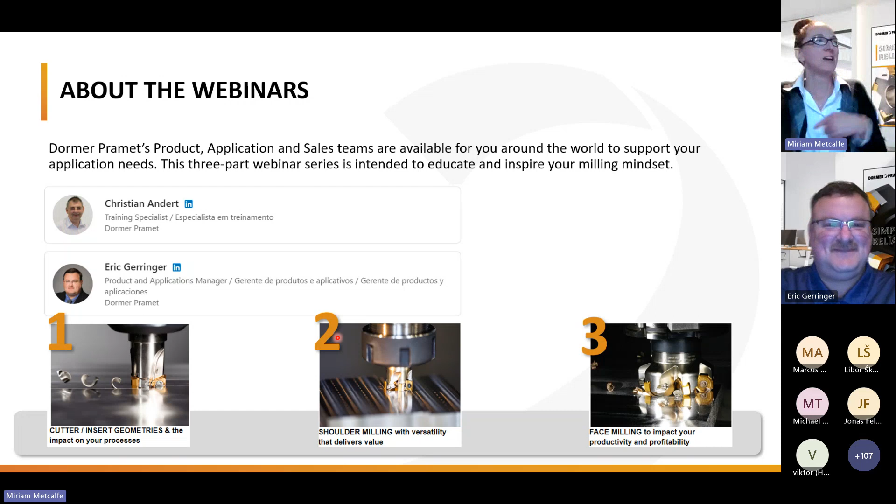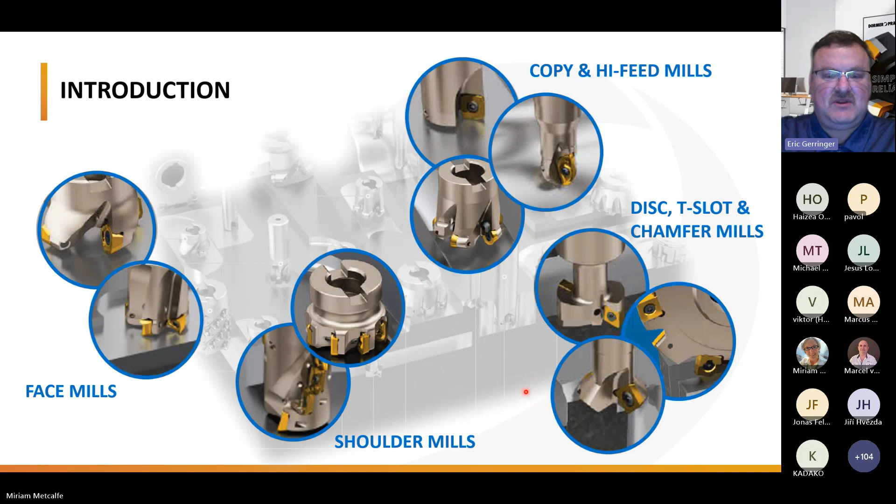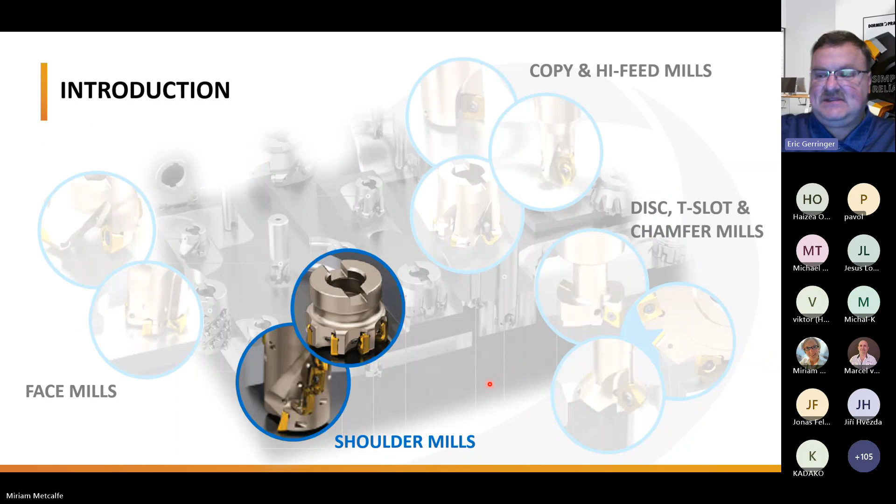So we'll touch briefly. Hopefully everybody was able to join us last week and remembers the 4 areas of milling we discussed. But today we're going to focus on shoulder milling and the versatility of shoulder milling. We'll touch on some areas such as milling methods and the versatility in shoulder milling. From the indexable shoulder milling applications, you start out, and you can also, from the perspective of general shoulder milling, think about solid carbide or even HSS or cobalt in some instances where you need that long AP, or that long length of cut. We'll touch a little bit on some repeated shoulder milling using end mills and face mills. We'll talk about some deep shoulder milling as well, using the helical style cutter, the long edge cutters with the inserts up the side. And we'll also touch briefly on some peripheral milling as well.

So, let's talk about the indexable shoulder mill applications.

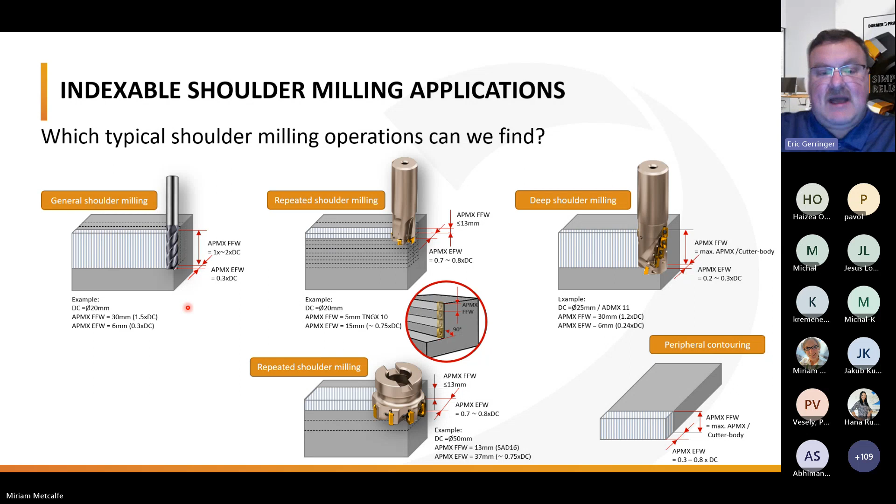So here you'll see, we just spoke about peripheral milling, a very common application. When you think about that, typically you're using end mills, usually smaller diameter cutters when you're doing peripheral milling. Of course, it depends on your workpiece.

You could be using large diameter cutters, but typically it's an end mill application. Some customers will even use solid carbide, HSS, or cobalt end mills when they're looking for that fine finish with no step overs from stepping down. But when you think about indexable tools, the versatility you get versus a solid tool lets you do many more things, and from a cost efficiency perspective, you're in better shape.

And then over in the middle area, we look at more of what I'd consider the standard types of shoulder milling applications. When you're talking about shoulder milling, you're typically milling a face and milling a shoulder, looking for that surface, and a lot of times you have a radius callout as well.

So this concept offers those extra geometries and radii to suit your needs. And one thing you'll see, not as common but still used in face milling, is disc milling cutters. I like to bring that up because it's one of those things to keep in your back pocket, don't forget about it.

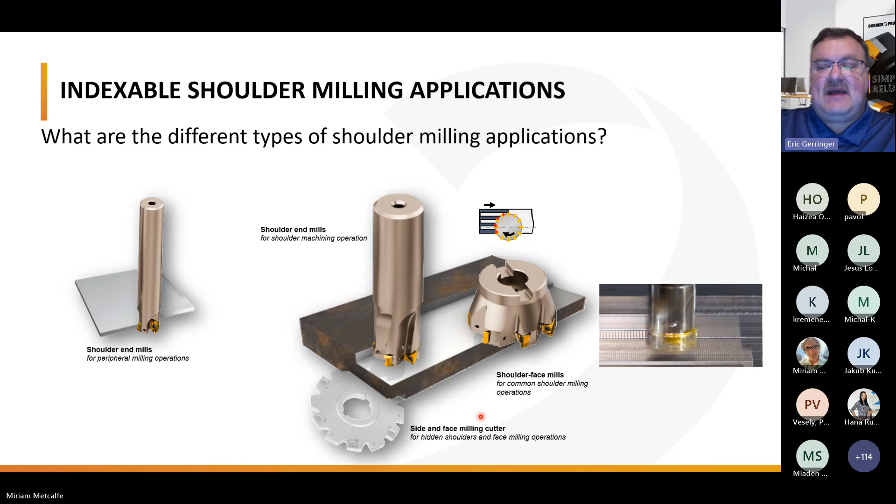With indexable shoulder milling, you can never forget about deep shoulder milling. There's a lot of terminology used in the industry - you think about helical mills, that's a pretty common term, and you'll also see the term long edge milling cutters. These cutters typically have multiple inserts up the sides of the cutter, as you see here.

They're very common in roughing applications where you're doing shoulder milling, or peripheral milling is also a very common application for these type cutters. The nice thing about these cutters is you're able to machine shoulder mill a large area, a large length of cut, in one pass.

However, one thing to verify, and I always encourage customers to think about this - when you look at a cutter concept like this, always think about your setup. Is my fixturing strong enough to support this type of cutter? Do I have enough horsepower? Do I have enough rigidity in my machine? We'll talk about that a little bit later in the webinar.

But those are just some of the concepts to think about with shoulder milling, and again the versatility this cutter gives you - from doing bores to shoulder milling to peripheral milling. So let's get into some of the methods on the next slide, talking about slot milling.

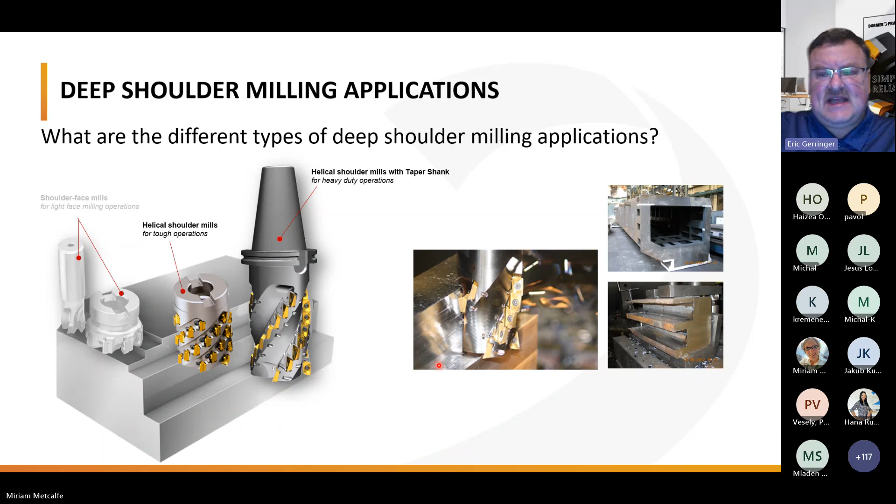When you get into slot milling, using shoulder mills or shoulder end mills a lot of the time is what most of us are doing. You think about what are some of the methods I see, what are some of the methods that are available to me?

A lot of customers think from the perspective of, I'm doing a slot, I'm using a solid tool - you're looking at typically more cost. So I can use an indexable end mill, shoulder mill instead. You think about the conventional slot milling method, which is what we typically see on softer materials, like your steels, even some irons and things like that.

That's just it's very easy to program. It's one of the most common methods you see. You're basically moving straight into the workpiece and straight into the slot.

But one of the negatives of this is it does create the most radial cutting forces. So you could potentially see cutter deflection, and that will impact your surface finishes.

The other thing is on really gummy, sticky materials, you could get chip jamming if you try to use too dense of a cutter, a heavy pitch cutter. You typically want to use more of a medium or coarse pitch cutter when you're conventional slot milling.

Then in the middle there's a technique that's become a lot more common over the last decade.

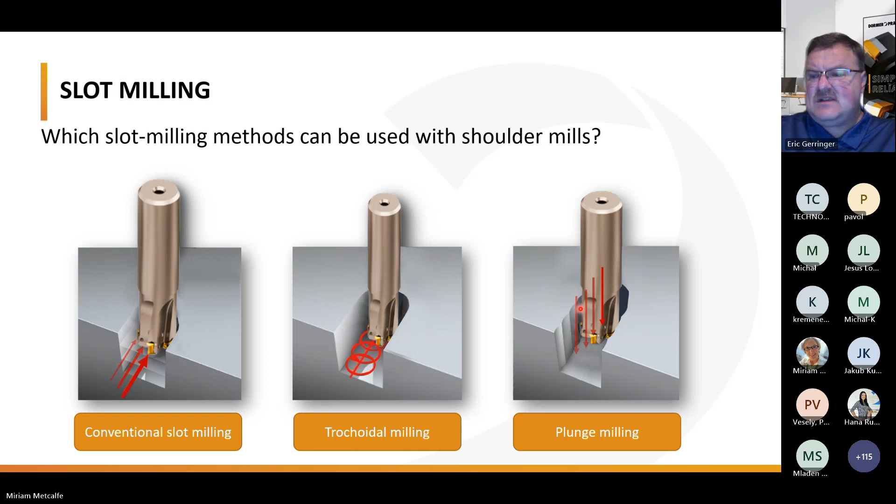So let's talk about how versatile the shoulder mills can be from a versatility perspective.

Do I need to ramp? Do I need to be slotting? Am I going to be doing helical interpolation, opening up maybe a bore diameter?

Those are the types of things you need to take into consideration, because when you get into the cutter geometry we spoke about last week, and into the insert geometry. If you have a single-sided positive insert, talking about a negative-positive cutter, it's going to give you the most flexibility. When you get into a shoulder mill, that's typically a double-sided insert with maybe a negative concept, you're going to lose some flexibility, such as ramping, or you'll have really shallow ramping angles. So always think about your process and the application demands for the cutter you're selecting.

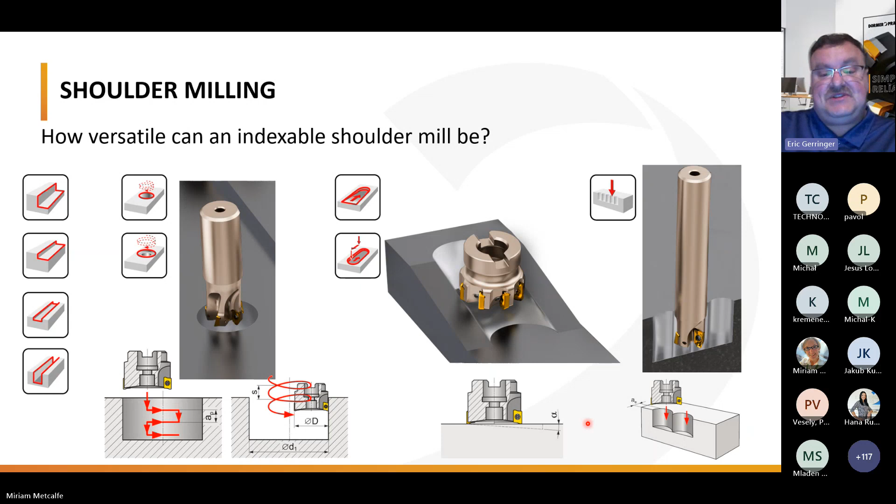That's kind of critical when you think about it: do I want one cutter to do everything, or do I want multiple cutters? What fits my work style or my shop? And also, what's going to meet my customers' demands from the print expectations, such as surface finish? Do I need a true 90 degree, or can I get by with maybe an 88 degree shoulder? And then also think about the machining recommendations for our next talking point.

This is really a big one. When you get into the machining recommendations, some things to consider: all the different types of milling applications. When you talk about face mills, end mills, helical mills, you get into just about anything, like we just discussed with the different versatility of a shoulder mill. So always make sure that you select the right cutter for you. That's a big one.

And then also, as I've briefly touched on before, when you get into larger diameter cutters, multiple teeth cutters with these helical cutters — does my machine have enough horsepower? Does my machine have enough feed rate? Can my fixturing stand up and hold that workpiece to machine at the feed rates recommended for these types of cutters? Always take that into consideration.

And then next, when you think about the milling strategy you're going to use, think about the impact that's going to have. One thing I always like to discuss with customers: when you talk about milling strategy, you want to try to arc into your cut and arc out of your cut. If you come in just straight milling in a straight line, you'll typically get some deflection, no matter how rigid your setup is, and that will affect your surface finish on your wall and on your face. So be aware of that in your cutter selection thought process, from your diameter and also your pitch.

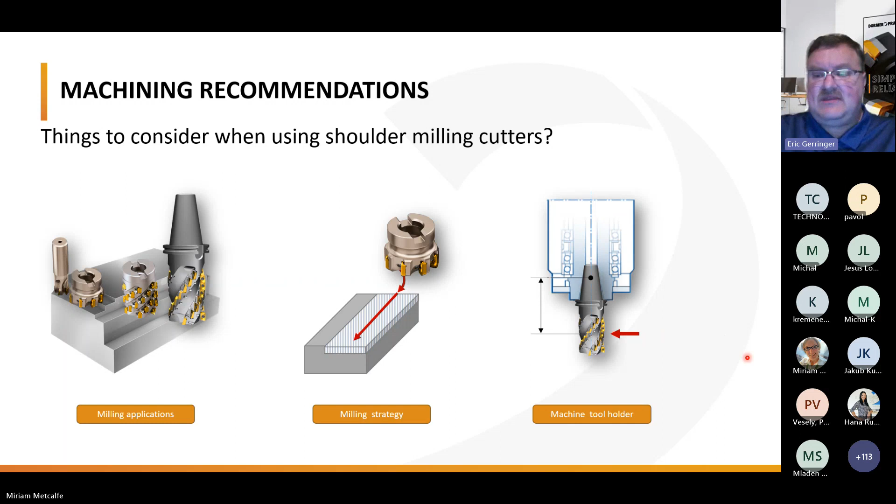Okay, and then I want to leave you with an example of one of our most versatile concepts.

Like the SAT 07 insert doesn't fit into the SAT 11 or the SAT 16. They require different inserts because that drives your depth of cut, your shoulder height, and length. But this cutter, you can do pretty much anything you want with it, from ramping at really steep angles. Keep in mind when we talk about ramping with a concept such as this, this is negative positive on the body, but it's positive geometry on the insert, and it's a positive insert, so it has a lot of clearance.